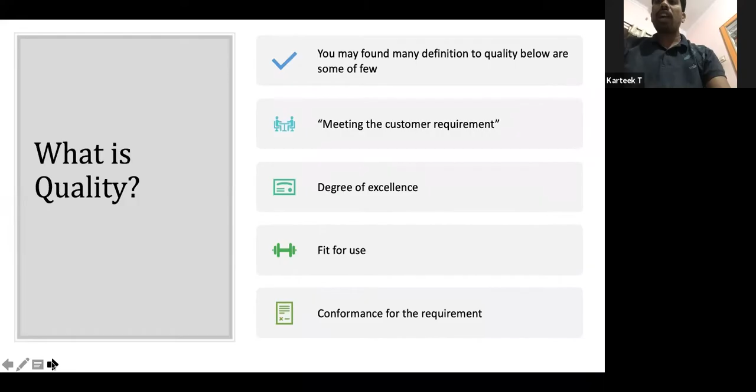What is the goal of quality? Quality is not a fine-tuning process at the final stage before dispatch. It should be inbuilt in every stage of inspection, starting from pattern shop to dispatch.

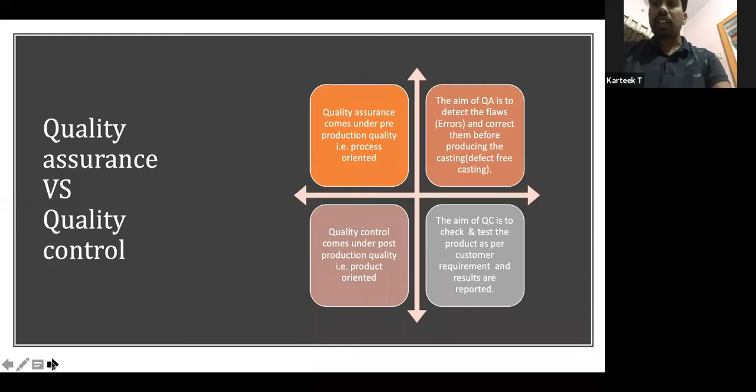The main aim of QC is to check and test the product as per the customer requirement, and results are reported for further analysis. Next slide. Right. Why is quality important? Quality is important in any industry, because if any deviation is missed in the final check, then the whole process calls for failure.

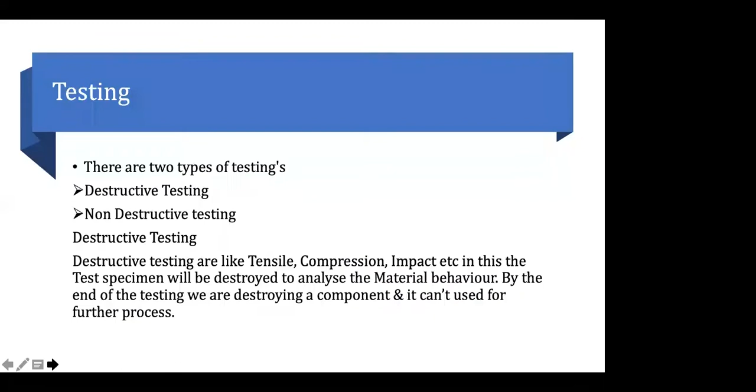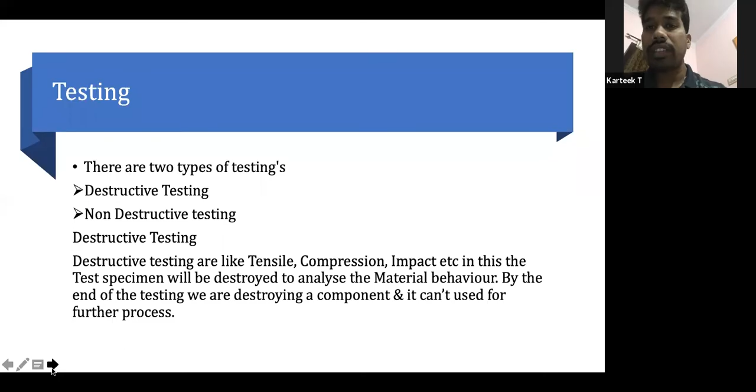Destructive tests are like tensile, compression, impact, etc. In this, you take the specimen and destroy it to analyze the material behavior. By the end of the testing, we have destroyed the component and it cannot be used for further processing. And NDT, non-destructive testing. Prayut, can you go to the next slide?

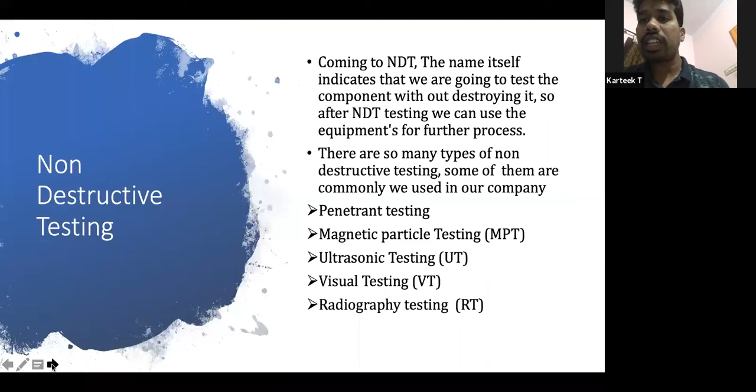Yeah. The name itself indicates non-destructive testing: without destroying your component or product, you are testing the part. There are many types of non-destructive testing. Some commonly used in our company are penetrant testing, magnetic particle testing, ultrasonic testing, visual testing, and radiography testing.

Penetrant testing works on capillary action. Penetrant testing can detect only surface defects that are open to the surface. The main important point is PT can be done only for non-porous components. In DP testing, there are two types: one is fluorescent and the other is non-fluorescent.

With fluorescent, after applying the penetrant, you have to check the interpretations with a UV torch, whereas non-fluorescent can be done with visible light.

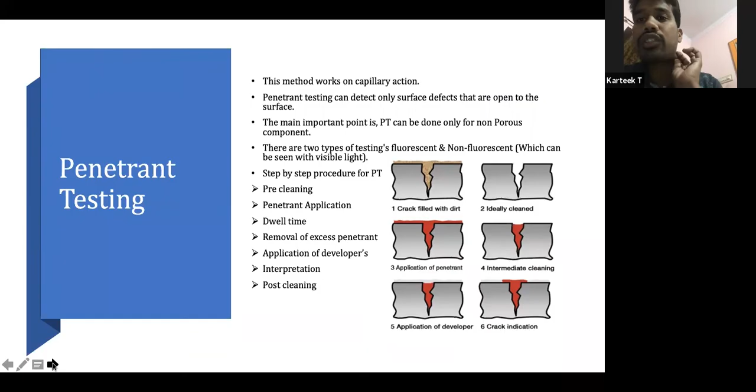Then after that, you have to apply the developer so that, through the capillary action, it will suck the penetrant and it will show on the casting or your component. Next slide.

Magnetic particle testing. MPT is checked for surface and subsurface defects like cracks, hot tears, inclusions, sand drops, and cold shuts. But it is mainly used for checking cracks, and this can be done from 3 to 4 mm. This method works on the principle of magnetic flux leakage. Normally

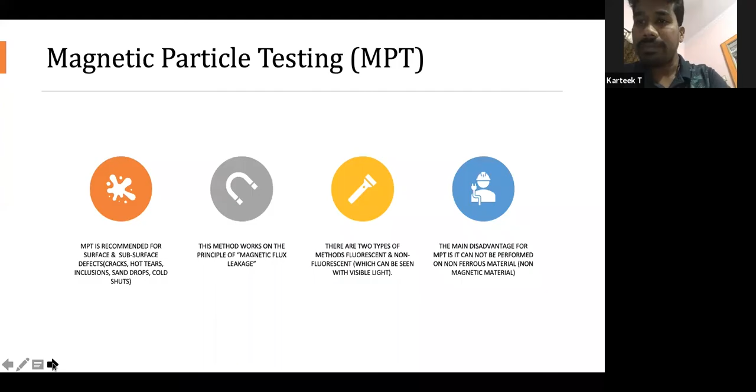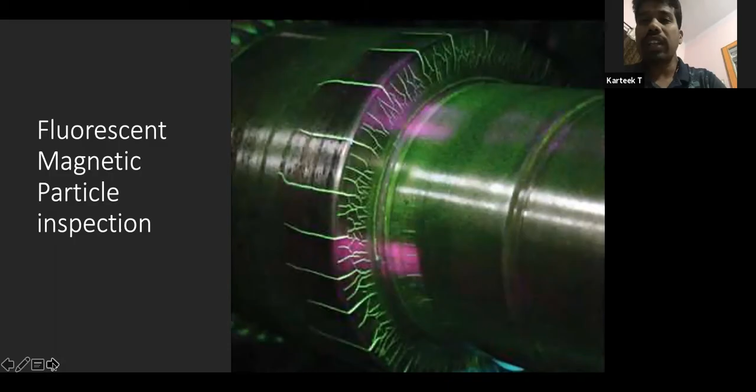The main disadvantage of MPT is it cannot be performed on non-ferrous material, which is non-magnetic. This is the fluorescent magnetic particle inspection picture. When it comes to normal non-fluorescent, only heavy cracks which can be seen with your naked eye can be detected. Whereas in fluorescent, very minute cracks which cannot be seen with your naked eyes can be detected and we can see them very clearly. This is the advantage of fluorescent magnetic particle inspection.

Coming to ultrasonic testing. We are transmitting high ultrasound in a component, and if there is any crack or any flaw, it will reflect back, and it is shown on your monitor. Ultrasonic testing is recommended for detecting subsurface defects. Only subsurface defects can be identified in ultrasonic testing. The main principle of ultrasonic testing is transmission of high ultrasound waves in a component and identifying defects.

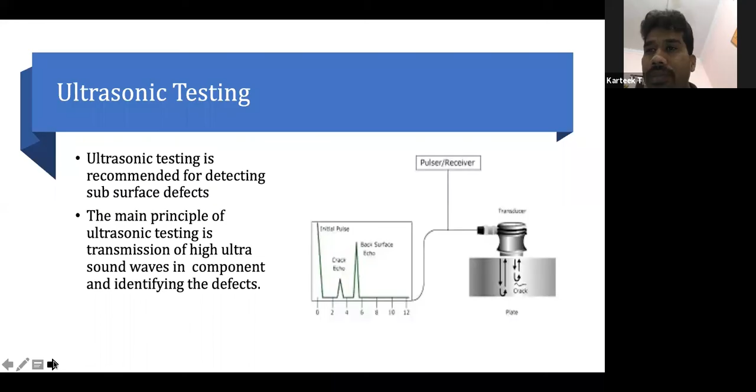In this, we have many techniques: pulse echo method and automatic scanning method. In pulse echo method we have A scan, B scan, C scan, and we have DGS and DAC curve, distance amplitude curve. This is used for checking multiple thicknesses at a time, and DGS is used if you identify a defect and want to know the defect size. With DGS we can check the defect size. Some equipment has that feasibility, some doesn't. Based on your selection of the

Hello. Yeah, we can hear you.

Yeah, based on your machine you can check that. Advantages of NDT testing. What are the advantages of NDT testing?

When you don't have NDT testing, you can check the mechanical properties like tensile, impact and all. When supplying parts for defense or aerospace, before NDT there was destructive testing: they used to cut the component at every section, mill it, inspect it, and develop that way. But now we have NDT. We can check components with ultrasound and radiography and see shrinkages and other defects, to avoid failures and save human lives, to reduce manufacturing and development cost, and to give information about defects and criteria.